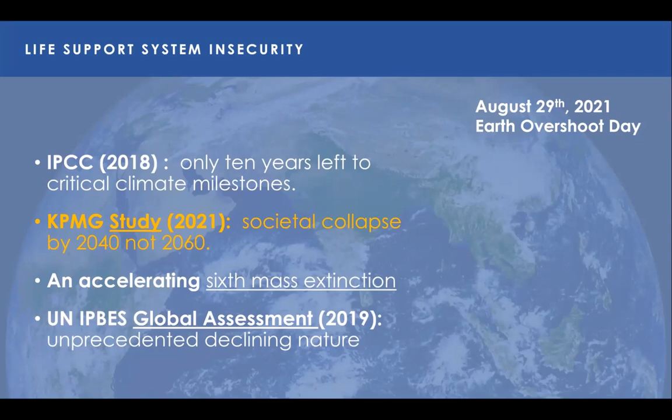So our predicament is that our current approach may not produce sustainability in the time we need, that most studies are anticipating societal collapse much sooner than we expected due to climate change. And we need to find a way to counteract this life support system insecurity.

And part of it is understanding that we mistakenly see the problem as environmental, sharing our frustration that the planet can't support the population that's currently inhabiting it, and treating the symptoms, not the sources, and using really a static approach in planning to address these symptoms when in reality, we need a more dynamic sort of perspective to understand the system of systems.

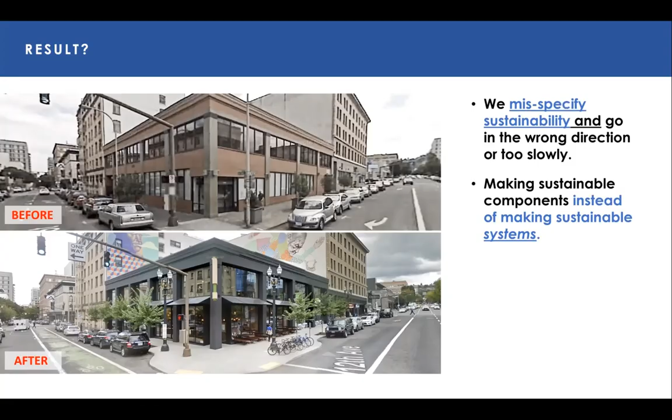Consequently, we misspecify sustainability and often go in the wrong direction or kind of move too slowly. What we need to do is instead of making sustainable components and focusing on elements of the urban environment of the planet, we need to be making or imagining how to blend systems more effectively.

So life support system security needs to focus on a sustainable scaled economy, one that sees the problem as our current economy destroying our regenerative capacity, and sees the built environment as the economy and solves the problem by redesigning the economy through a redesigned regenerative built environment that sustains desired human and natural outcomes and creates regenerative local economies,

that advances an emerging transformative regenerative planning and design method, shifting from reducing impacts to eliminating impacts at their source, moving from linear flows in the human system that produce waste and use up finite resources into circular flows that produce no waste and use infinitely regenerated resources.

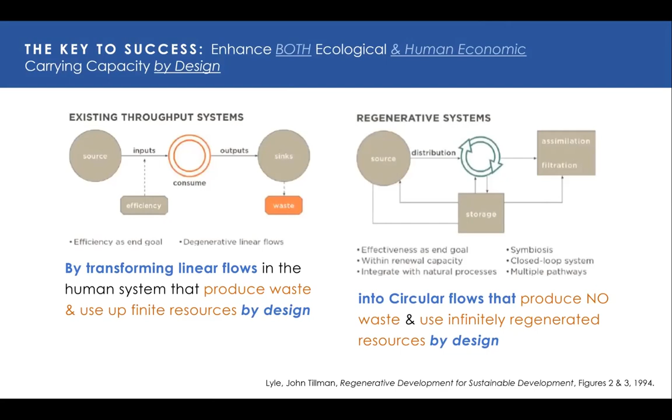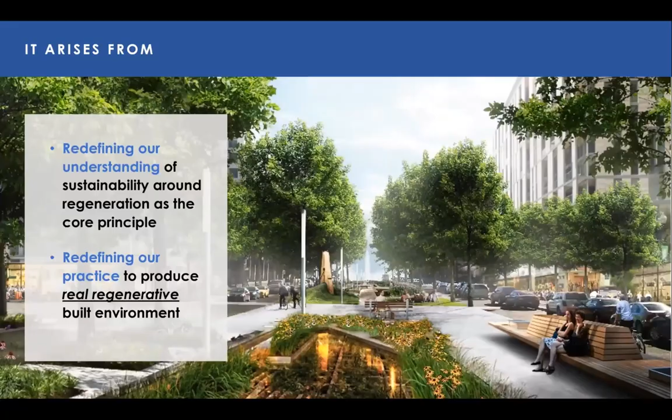And it arises from a redefining understanding of sustainability around regeneration as a core principle and redefining our practice. Moving from silos to systems, moving from non-renewable to renewable, moving from net negative to net positive.

This shift connects the human economy and society to the biosphere's living systems and allows us to ensure life support system security through biosystem mimicry to create a circular economy at this district scale, which is the scale in which you can start to blend nature and human systems in a more considered way.

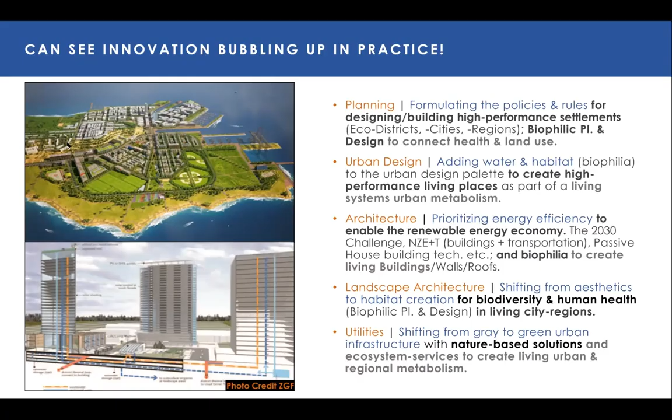But to do so, you'll need to formulate policies and rules in our planning practice, adding water and habitat to urban design decisions and prioritizing energy use efficiency in architecture and shifting from aesthetics to habitat creation in landscape architecture and shifting away from gray to green urban infrastructure.

And then going to see those cities that are using their existing investments to invigorate their potential at regenerating urbanism around the world in bold programs and projects.

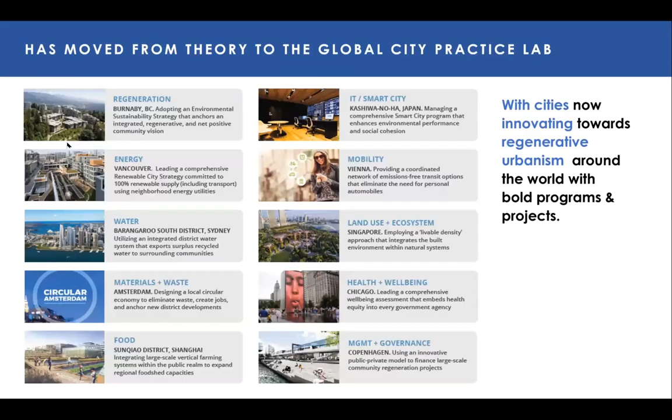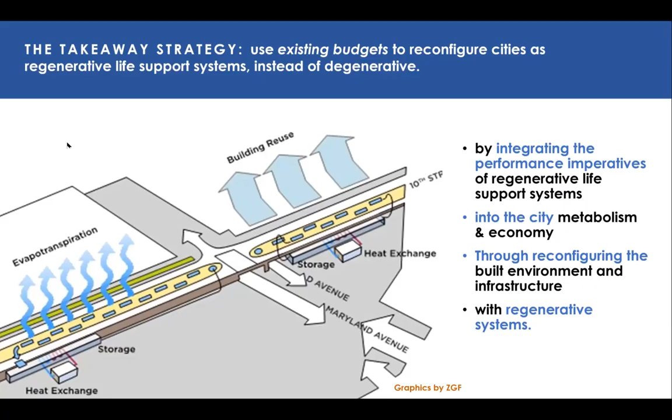And this concept of using the existing budget to reconfigure our cities is a critical change in perspective by integrating the performance imperatives into the city through reconfiguring the built environment and infrastructure with more regenerative systems, using the existing budgets in new ways, imagining the built environment as the built economy, and in so doing, create a new design that is a win-win for future jobs and supportive of the environment, so we can have them coexist and interoperate.

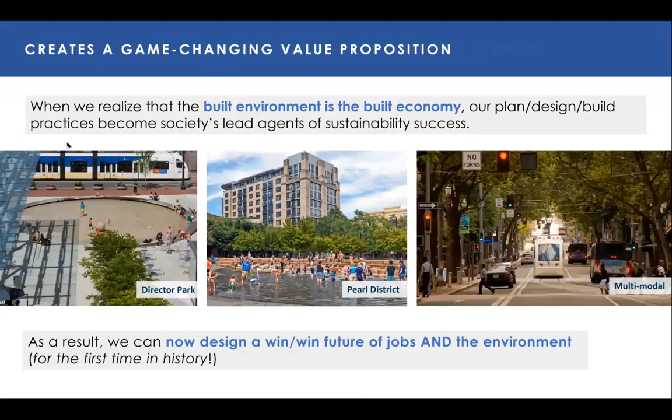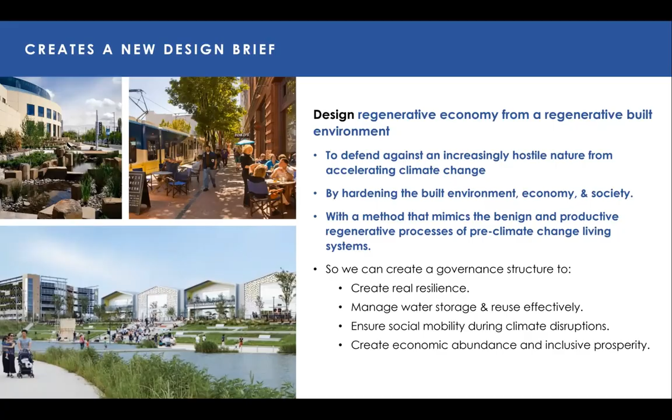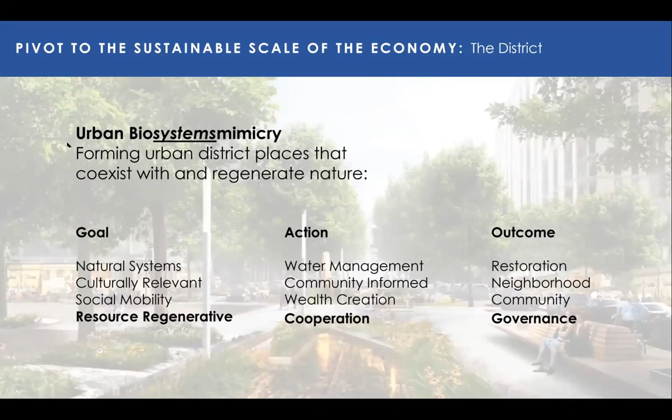To defend against increasingly hostile nature from the accelerating climate change with a method that mimics the benign and productive regenerative processes of pre-climate change living systems. And we see the sustainable scale of the built economy as the district, but we know that with urban biosystems mimicry, we need to add a new goal of resource regeneration, and we need to consider a new action of very intense cooperation, and we need to have an outcome, a planned outcome, to be a new governance structure to hold the community's behavior, nature, and the setting together in one place.

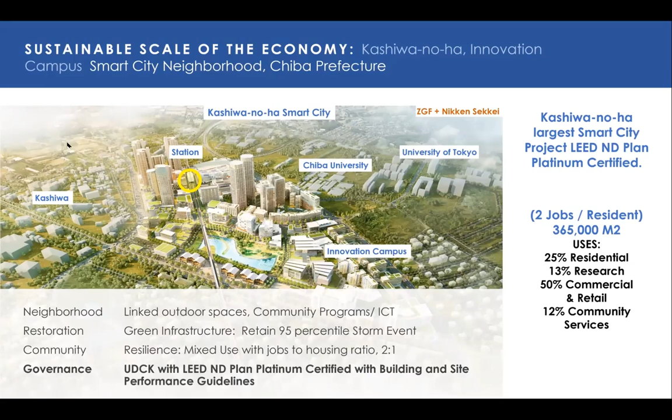And we have accomplished this in Kashiwa-no-ha, in Chiba Prefecture, in the Innovation Campus, which is the largest LEED ND Plan Platinum certified smart city in the world. And it does this because it has a local coordinating entity and a governance structure that allows it to deploy building and site performance guidelines to organize the economy and nature to convert a transit-oriented development into a regenerative community. And I think that this is really the key, is having a public-private academic entity with cooperative groups that

really is a hub for innovation with the community, and having the community fully understand the metabolic flows in their district and how they can shape the nature and water to make settings that stimulate economic activity and livability, and in this case, to reconcile Japan's national interest in addressing resiliency, low birth rates, super aging, and economic malaise. So they use the economy and the setting very carefully to generate new outcomes.

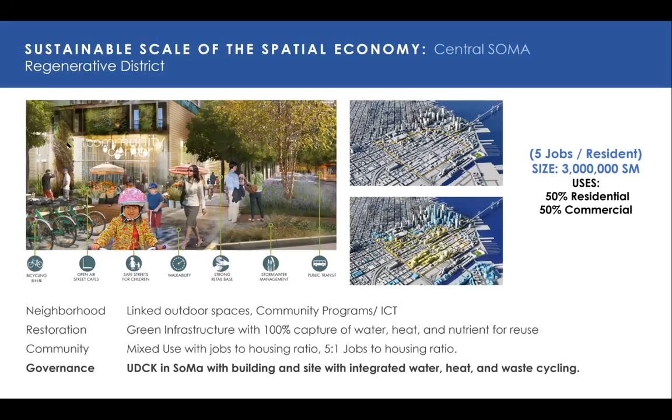We studied this concept in San Francisco with Scott Edmondson to just study what would happen if you put a UDCK type entity in Central SoMa and converted an eco district into a regenerative district by just enhancing the connection between water, heat, and waste cycling between buildings across the district, having a UDCK entity that could manage water with heat exchange, coordinated blue-green infrastructure, connected blocks and buildings, and integrated resource and material cycling. And we realized that we could generate a $2 billion added market value with regenerative performance by just investing and reconfiguring the neighborhood with a governance structure in a slightly different way.

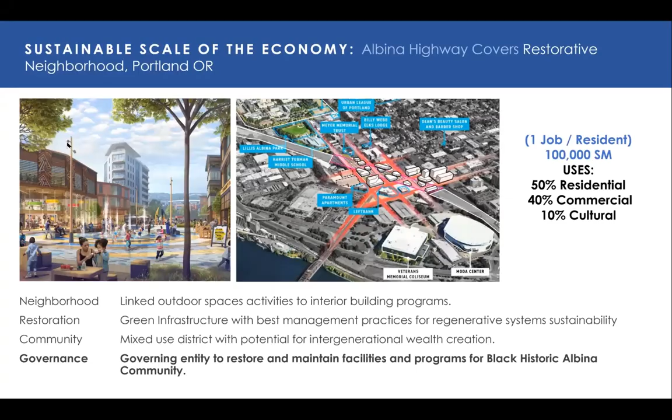And our work now in restorative justice builds on this concept. Working on the Albina highway covers, we're working with the Black community in Portland that has been historically harmed by racist planning policies around transportation to regenerate and restore a community. And this requires a governing entity to restore and maintain facilities and programs for the Black historic Albina community. In the same way that we would address climate change, we can address restorative justice.

And finally, in closing, I think we all know that a very powerful investment in a smart building that's very carbon neutral is very important, and that can be catalytic to a district, but we also really need to be spending as much time thinking about the district and how it integrates and makes a new economy to allow many different buildings and different groups of people to interact and sustain themselves in economic prosperity with nature.

So in closing, the global practice really needs to consider using existing budgets to fund restorative instead of degenerative solutions, design new innovative governance structures, and generate and coordinate regulations and investment that create the regenerative built environment, which in turn creates sustainable urban economies for communities.